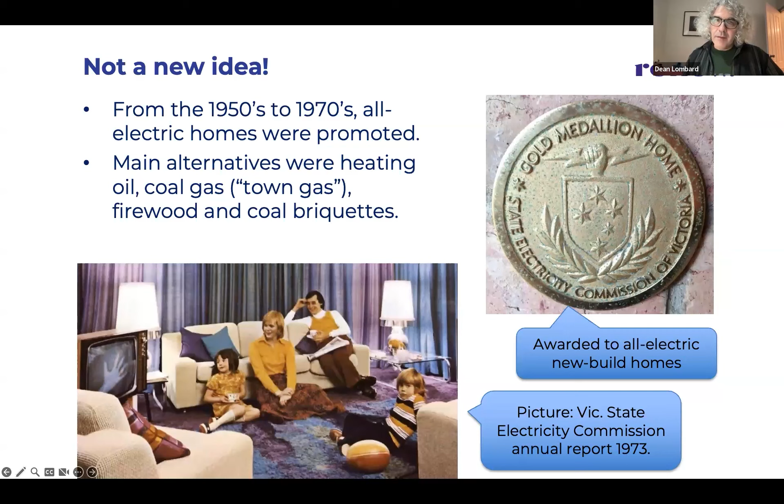That started to change in the 70s when gas became suddenly more available, especially piped gas direct to homes in Melbourne and later other cities and towns in Victoria. Gas was really cheap from the 70s to the 2010s, and that was really appealing. Gas appliances were much cheaper for heating and cooking, and gas cooking was way more flexible and nuanced than cooking on those old electric stoves. So gas became very popular, and there was a massive government support program to help people transition into gas appliances.

The whole city and many country towns were piped up. Whole house ducted heating became more and more common until by the 90s it was pretty much the default for most houses, especially in Melbourne and Geelong, and in a few other places in Australia, like Canberra, which has a lot of ducted gas heating, and some parts of New South Wales. Ducted gas heating burns a heap of gas, as you would know if you had it, but when gas was really cheap, that didn't really matter.

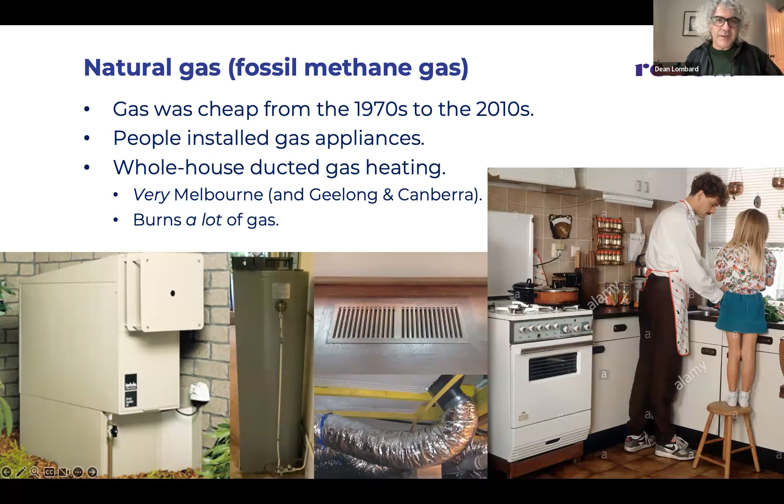Gas was so popular that a massive bottled gas industry also took off. In a lot of country towns where you couldn't get natural gas, people would get LPG gas bottles to run heating and cooking. A good thing to note is that natural gas is not necessarily natural - it's dug up out of the ground. It's actually methane, and it's just called natural gas because that was a good marketing term.

The story of why gas suddenly appeared and became cheap is basically that oil drilling started in the Bass Strait in the 1960s, and methane was basically a byproduct of drilling for oil. The pipelines were built in order to make some money off this otherwise waste product from the oil industry - that's why it was all built and why it was so cheap. But now the oil wells are pretty much dried up in Bass Strait, and gas is no longer very cheap. In fact it's gotten very expensive, and is getting more so with the impacts of the war in Europe and everything.

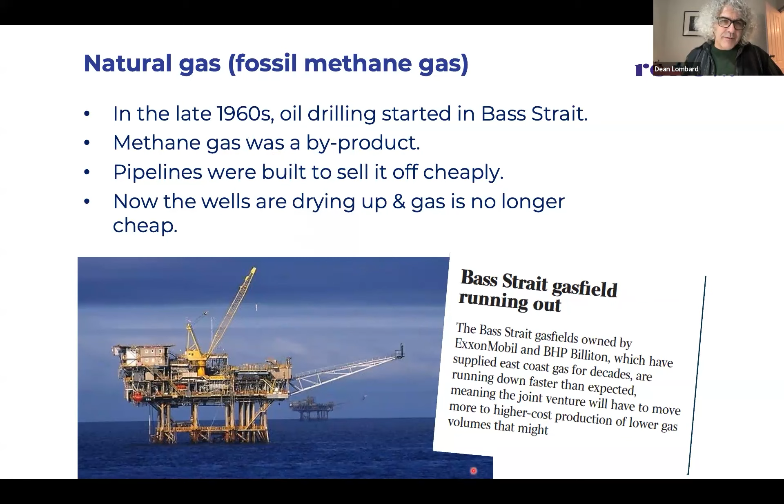So as the options for fuel in homes changed, the types of appliances that homes could buy changed as well. Some people are familiar with old style electric appliances, like stoves with resistive electric elements that take a while to heat up and then take a while to cool down. You've got to get the knack of how to cook with those, and we don't really like them very much in Melbourne, do we? We like our gas cookers.

Electric hot water systems also use a resistive element, same as electric radiators. The resistive element basically means the electricity goes through a wire that has a lot of resistance, which heats up the wire - that's how you get the heat. That's the basic principle for a whole lot of these old school electric appliances.

Once gas became the main fuel for cooking, heating, and hot water, we started to get gas stoves and gas hot water systems, which at first were pretty similar to electric, but fired by gas. Now more common are instantaneous gas water heaters that just heat the water as it's going through the pipes to come out the tap. And of course, gas heaters.

We used to have wall furnaces or console heaters, and now we're more likely to have ducted heating. But there's new electric technologies that weren't available in the 60s, and it's really based around the heat pump. The heat pump is really the same principle as a fridge, but sort of in reverse. It uses ambient heat from the air to make heat.

You've all seen reverse cycle air conditioners, often called split systems, that cool and heat. They use this heat pump to do that, and in 2023, this is a more contemporary heating appliance - a reverse cycle air conditioner or heat pump heater of some kind. You also have heat pump hot water systems, which use the same principle of a heat pump to heat the water instead of resistive electric wire.

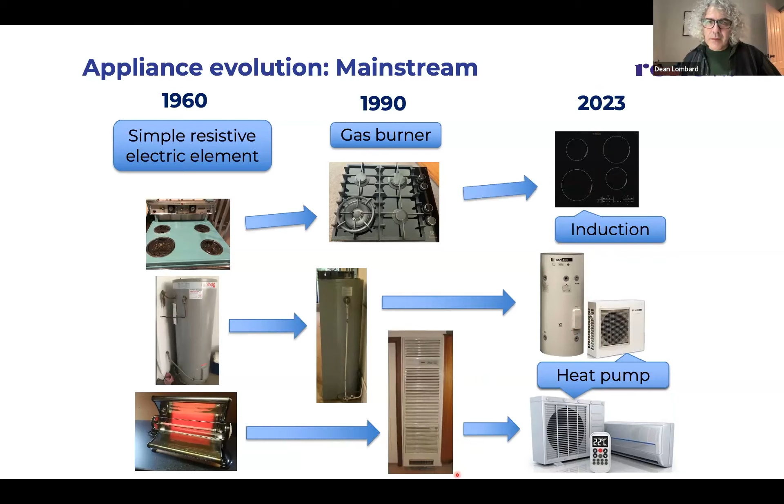So the heat pump is the big deal in these new types of appliances. Here's a little explanation of how it works. Basically, the box that's outside the house - it might be on the ground or up on the roof - is sometimes called a compressor. It's actually sort of the heat pump itself. It's got a compressor, it's got heat exchange, it's got all these parts to it.

Basically it sucks in air from outside, sucks all the heat out of the air, and then spits out the really cold air without the heat out the other side. You might not think there's that much heat in air, especially on a cold day, but even cold air still has quite a bit of heat in it, because we think of heat as being hot, but heat is actually just a quality of a gas or a solid - I'm not a physicist, so I'm explaining this wrong, but heat is in nearly everything.

If something's really cold, the thing with no heat in it at all is at minus 273 degrees Celsius. That's when there's no heat in the thing. As long as something is not as cold as that, it's got some heat in it. And that's what the heat pump does - it sucks the heat out of the air. This box is operated by electricity.

It basically spits the heat into the device that then heats your house through the stuff that's in here. There's a heat exchanger in there and a heat exchanger in there, and they use refrigerant liquid, which you might be familiar with if you've had to get your car air conditioning fixed. Refrigerant liquid is used to transfer the heat, to take the heat out or put the heat in.

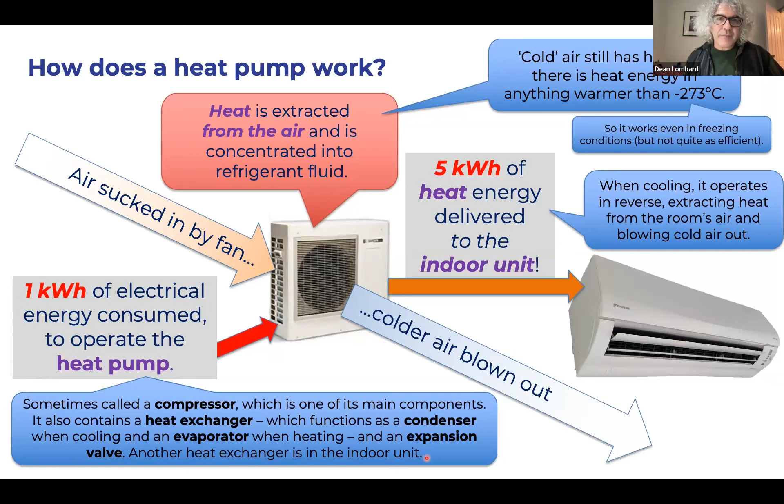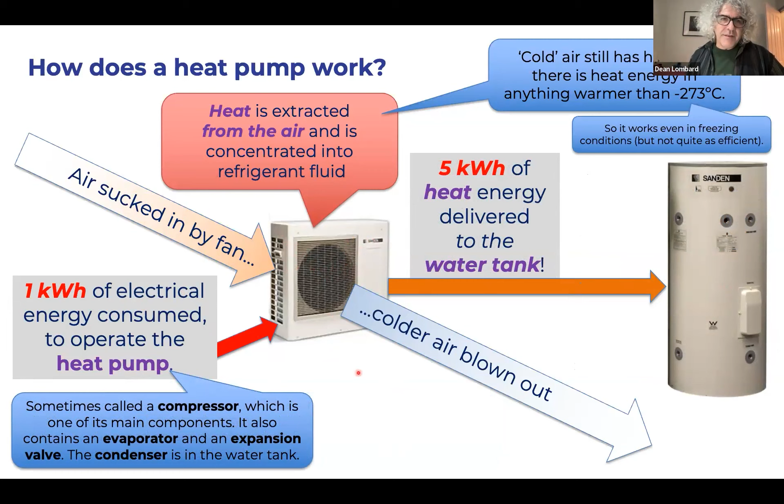Heat pump hot water systems work exactly the same way: get the heat out of the air, spit the heat into the tank. And if you run a heat pump backwards, you get cold instead of heat. That's how the air conditioner makes cooling, and that's also how your fridge works - it uses the exact same principle, built into the fridge, to take the heat out and make the stuff cold. So that's the heart of these efficient appliances.

The reason we talk so much about heating and hot water is because they're by far the two biggest energy users in our homes. This data is probably a few years old, and it varies a lot with different houses and depends on lots of things, but on average almost half the energy used in a home is used for heating in Melbourne, and 20 to 30% is used for hot water, with everything else making up the rest. Cooking isn't really very much, lights are hardly anything at all, and the fridge, if it isn't too inefficient, also not much.

So there's two reasons why we talk about these appliances when we're talking about all electric homes. One is because they're the biggest energy users in homes, and the other is because these are the things that can be operated by either gas or electricity - hot water, heating, and the cooktop. Pretty much everything else is usually only done by electricity. So that's why these are the important things when we're talking about all electric homes.

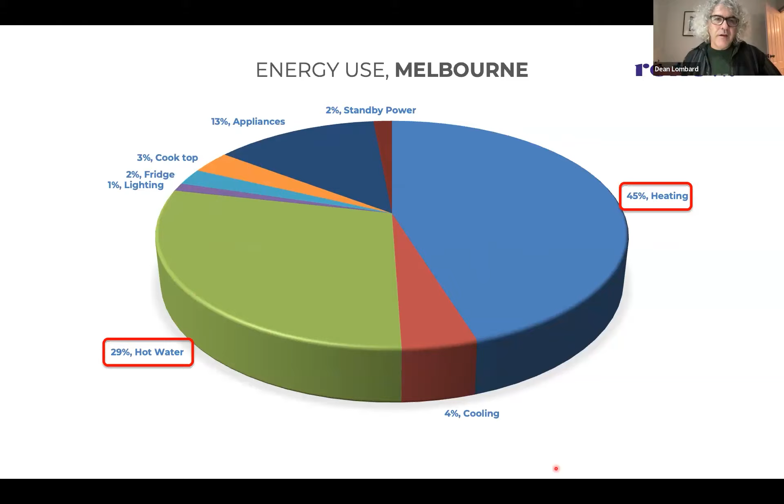So why you would want to go all electric, there's sort of two main things: what does it cost you, and how much carbon emissions does it make.

What we find is that back in 2018, the efficient electric appliances usually cost a little bit more upfront than the equivalent gas appliances. That's changed in the last few years - the cost difference, especially with reverse cycle air conditioners, has come down a lot, and they're much more equivalent to gas ones now. The heat pump hot water system still costs a bit more, but even in 2018, the lower energy bills over its lifetime more than made up for the extra cost and led to a saving. That saving is particularly driven by heating - we use a lot of heating in Victoria, and if you replace ducted heating with a few reverse cycle air conditioners, you pay it back in a few years and then you're ahead for the rest of the time.

We've done this study a few times, and this is the most recent one - it's a big job that needs a bunch of funding to do. But we did do a more recent study on a smaller scope last year, because you'd be aware that we've had a bit of an energy crisis, and energy prices have gone up and are going to go up for the next few years.

So we did a smaller study just looking at running costs, factoring in the rising energy prices over the next few years. And that modeling basically found similar sort of thing: everybody's prices are going up, but dual fuel homes' prices are going up faster and will go up higher than all-electric homes. People who are all-electric and have solar will have the lowest price increases. They'll still have price increases because prices are all going up, but they'll have the lowest.

This study also looked at the examples we use of a typical existing home and a typical new home. The difference between them is the thermal performance - the insulation, the draught proofing - because new homes have to meet a higher standard. This study also showed, again which we've done in several studies, that if you improve thermal efficiency by making sure you've got the right insulation, draught proofing and good window coverings, you also save a lot of money because you save so much energy usage.

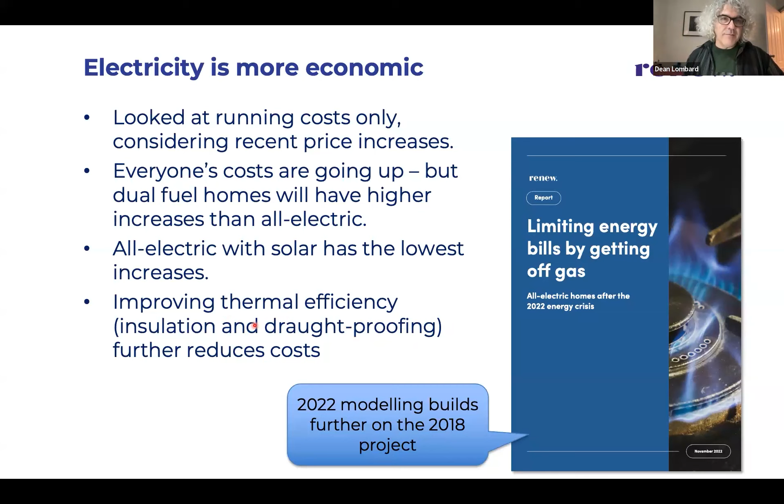Now, in our view, and in a lot of people's views, there's a lot going for getting rid of gas and going all-electric in terms of cost. And obviously the gas industry is not crazy about that idea, because they see that as a bit of an existential crisis for them. They'll often say, well, gas is actually cheaper than electricity, and they'll question the sort of modeling that we do.

So I'm going to run through the cost thing because it can be a bit confusing. If you look at your bills, you'll see - and this is current prices - gas is about 3.4 cents a unit and electricity is like 23 cents a unit. That's a big difference. Gas is looking a lot cheaper than electricity there.

But if you look closer, you'll see they're different units, because gas is measured in megajoules and electricity is measured in kilowatt hours. If you're going to compare the prices, you need to compare them in the same units. There's 3.6 megajoules in a kilowatt hour, so gas is actually 3.6 times more than the price it says there in equivalent units. If you look at them both in the same units, kilowatt hours, gas is actually about 12 cents a kilowatt hour and electricity is about 23 cents. Gas is still about around half the price.

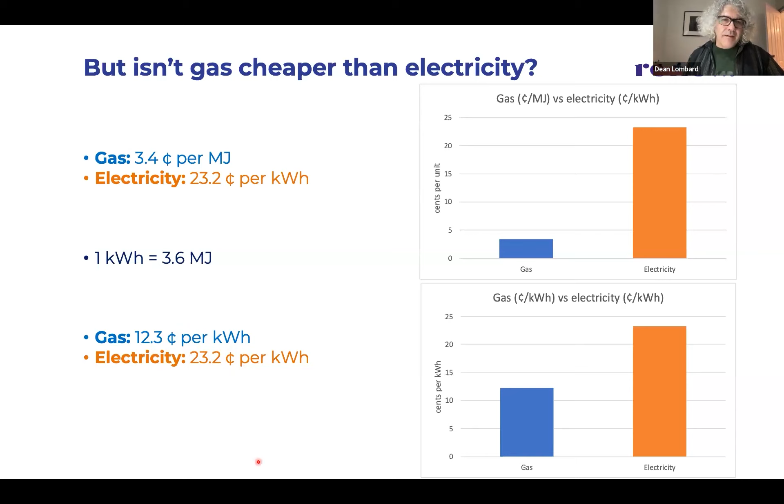So that does seem to back up the gas industry's claims that gas is much cheaper than electricity, and that's normally the figure that they use - gas is half the price of electricity in the same units. But there's one other factor that they sometimes conveniently forget, which is that it really depends on what you're using it for.

If you remember from a few slides ago about how heat pumps are much more efficient in their use of energy than other electric appliances, that's actually the trick, because a gas ducted heating system is about 80% efficient. That means for every 100 units of gas that goes in, 80% comes out as heating in the room, and about 20% is lost - some through the ducts, some through the process of combustion. And that's an average. A brand new system might be a bit more efficient, an old system could be a hell of a lot less, like 50% if there's holes in the ducts. So it does vary a lot.

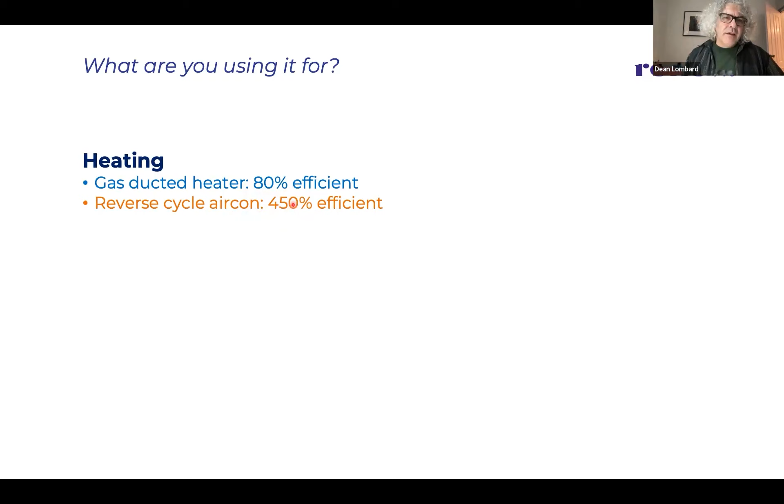Reverse cycle air conditioners are 450% efficient or often more. And remember, that means you get more out than you put in, because we put a bit of electricity in to suck all this heat out of the air, and then that's the heat that goes out. So reverse cycle air conditioners are many times more efficient than gas ducted heating, if you look at it in terms of energy in to heat energy out.

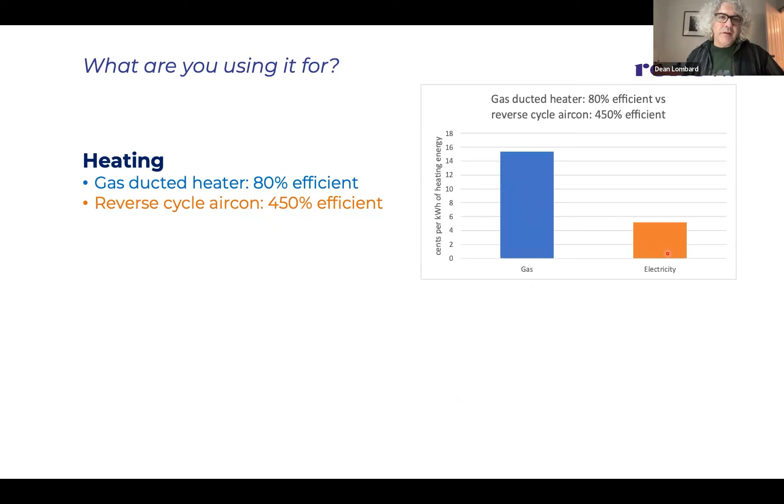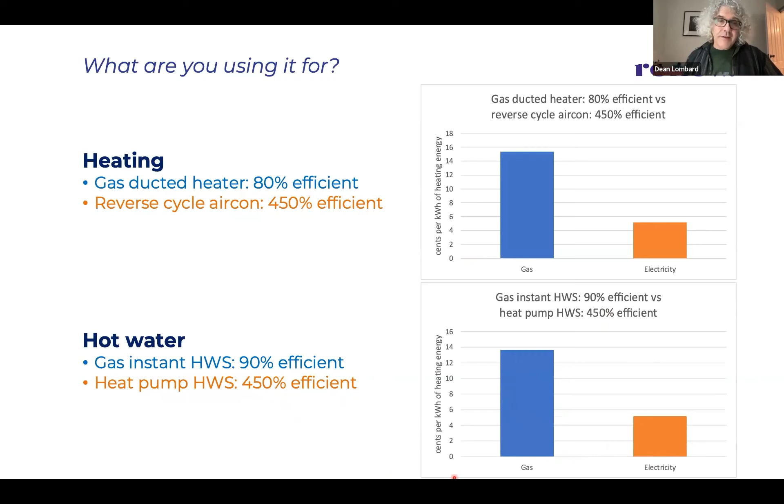So if you factor in the efficiency, gas ends up sort of 2.5 times more expensive than electricity, if you look at the cost per energy output of the heating device. And it's a pretty similar story for hot water - instantaneous hot water systems are very efficient, 90%, pretty good. Heat pump hot water systems are also about 450% efficient. So again, when you look at fuel cost in to heat energy out, gas is about twice as expensive. And this is the secret, the mystery of why these heat pump appliances are so much cheaper to run than gas appliances, and indeed than the older style electrical appliances that use resistive elements.

Now, that report I showed you, that orange one, has lots of very detailed modeling in it. We looked at a whole lot of different appliance replacement scenarios, and the take-home message is replacing gas ducted heating with a few reverse cycle air conditioners arranged around the house to get the equivalent heat costs a little bit more, maybe, but will save so much money that it pays back any difference in a year or two, and then you're basically spending less.

Hot water, when we did this study in 2018, it was sort of break even, because the heat pump hot water systems are quite a bit more expensive than the gas ones, but they cost less to run, and you break even over the life of the appliance, which was about 10 years. Of course, they sometimes last longer. Heat pump hot water systems are a bit cheaper now, so that's probably a bit ahead.

Cooktop, replacing a gas cooktop with induction. The inductions tend to cost a bit more, but they've also come down a bit. They cost about the same to run, so that's also a bit of a break-even sort of thing. Though, as I said, cooking doesn't use much energy, so it doesn't really matter so much. The main thing to think about with cooking actually is the health thing, because gas cooking puts particulate pollution in your air, which has been shown to be bad, especially for kids who are prone to asthma and people with respiratory illnesses.

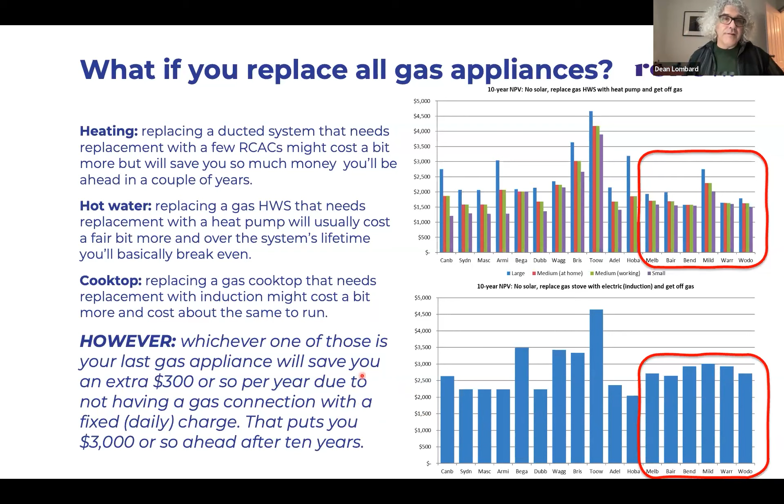The other part of this story, though, is, I mentioned before about that gas fixed connection charge. If you get your last appliance off gas, you suddenly save another $300 per year, in addition to any usage saving, because when you close your gas account, you no longer have to pay that daily connection. And that actually makes quite a big difference. That's why, even though cooking doesn't cost much money compared to the other stuff, and even though cooking with induction is not really that much cheaper than cooking with gas, if this chart here shows, if you only have a gas cooktop on gas and you swap that for induction, you actually save $2,000 to $3,000 over 10 years because you're losing that supply charge.

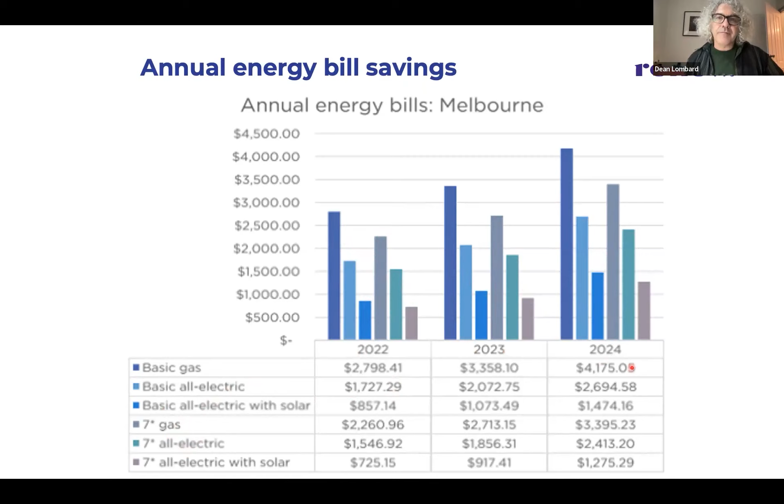If you're really interested in that, you can look up that report on Renew's website and read all the gory details. I'm going to move on to the emissions story, because this is something also that people are very interested in.

And it's also one that there's a bit of misinformation or misunderstanding about, because, again, gas is often talked about as a much lower emissions fuel than electricity. And for a long time, that was probably true, because electricity was basically made by brown coal in Victoria, which is the most polluting coal that there is. But of course, now there's a lot of renewable energy in the grid as well, so that's brought down the emissions intensity of electricity quite a bit. It's still higher than gas.

Gas has much less emissions than electricity. There's a bit of a caveat there, because the emissions of electricity generation are very tightly regulated and controlled and monitored, because it's just under the regulatory framework for electricity.

The emissions of gas are not closely monitored and measured, so there's a lot of doubt as to how accurate the official figures are. Some people say the emissions of gas might be 2 or 3 times higher than the official figures, but I'm not qualified enough to have a definitive view on that.

So I'm going with the official figures. In Victoria, the emissions intensity of gas - basically how much carbon emissions there are per unit, in this case per kilowatt hour, using the same units for both fuels - compared to the emissions intensity of electricity: electricity in Victoria is 4.6 times more dirty in terms of carbon emissions than gas.

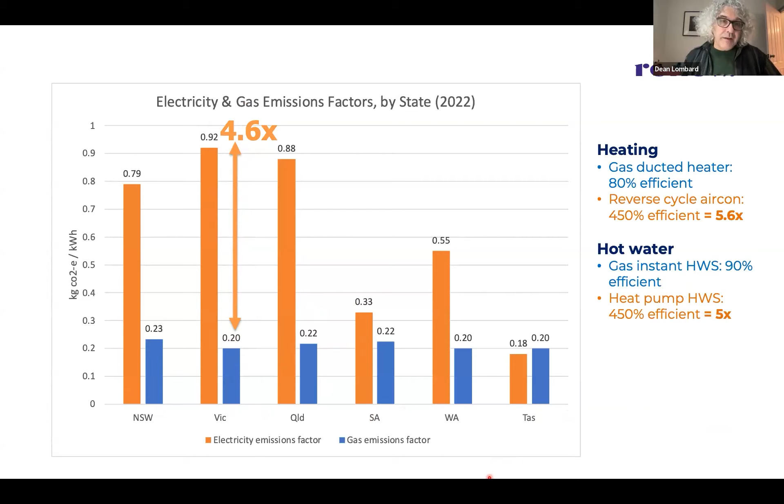And this is all the main states - that's Victoria. Renew did a more exhaustive study in 2019 using a similar approach to the cost study: let's look at the house in total and all its electricity usage, its different appliances, and how the emissions of an all-electric home compare to the emissions of a dual fuel home. We looked at a few cities in each state, and the Melbourne ones are over the side here - that's Melbourne, sorry, the other Victorian ones.

It's a bit close, but dual fuel homes have higher emissions than the equivalent all-electric homes everywhere in Victoria, apart from the really hot areas like Mildura, where it's actually a tiny bit more emissions with all electric. That'll be different now because electricity has become less emissions intensive since we did this study, so that'd be more level.

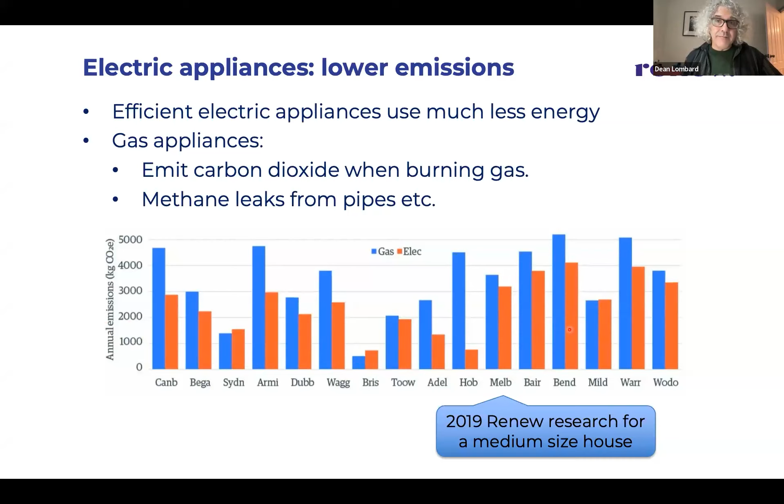And all around the rest of Australia, it's only in Brisbane and Sydney where there's not that much heating - they're the only places where all-electric homes have more emissions. Everywhere else, all-electric homes have lower emissions than dual fuel homes.

And that's emissions now - emissions keep changing. Gas is actually getting dirtier because, like I mentioned before about the Bass Strait oil rigs drying up, more and more gas in Australia now is not taken from deep sea drilling, but is on ground, what's called unconventional. You would have heard of coal seam gas and fracking - they're the most common ways for new gas projects to be happening now.

In Victoria, we're still getting the dregs out of Bass Strait, but most other places, most of the gas comes from fracking or coal seams, and that's much more emissions intensive than taking gas from deep sea drilling, as well as, you know, methane leaks and groundwater risks.

And of course, the other thing with our gas industry is one of the things that's driving the price is that we're exporting so much gas. About 70 or 80% of the gas that we mine in Australia is exported overseas, and that's what's driving our price high. So when people talk about a gas shortage, the shortage is because the gas companies are selling 80% of it overseas and only leaving us with 20%.

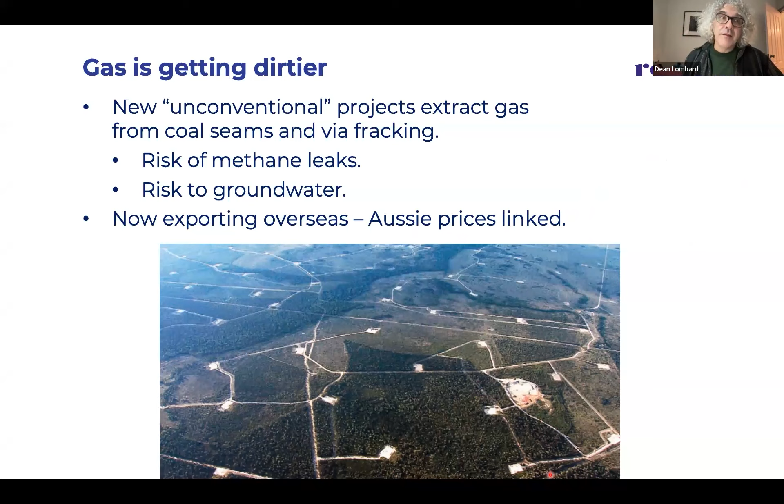So gas is getting dirtier. Electricity is getting cleaner every year. Solar farms, wind turbines, ginormous projects like Snowy Hydro - when that's done, that's basically a ginormous battery that will store excess solar energy during the day and use it at night - as well as, of course, people putting solar on their roofs, that all becomes part of the grid. When you're exporting electricity from your solar, that's part of the grid. So every year the electricity grid gets cleaner.

It's already about 30% renewable, which surprises some people because we're used to thinking of electricity as coal. 30% of it is not coal or gas, it's solar, wind, and hydro. We buy a lot of hydro from Tasmania. There's heaps of solar farms and wind farms, and we also buy solar and wind from New South Wales and South Australia.

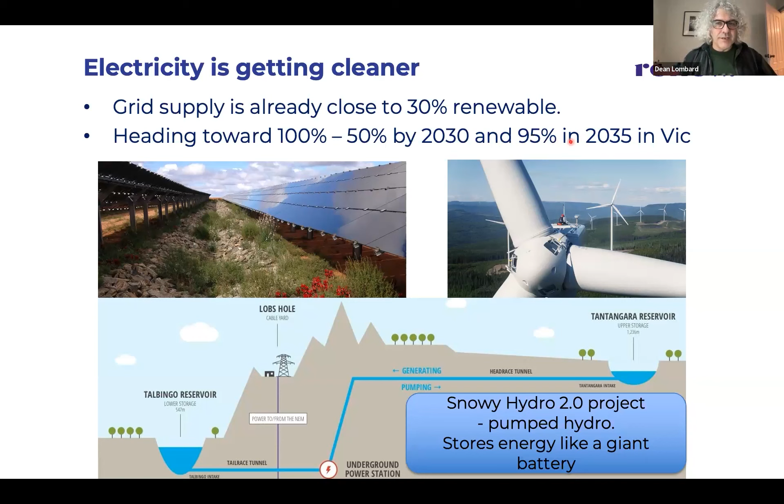And we are heading towards 100% renewable eventually. The Victorian government has a 50% renewable energy target by 2030, 95% by 2035. And nationally, AEMO, which operates the national electricity grid, is predicting about 83% renewable energy in 2030. So that's a huge change.

So if we look back at this emissions chart, that's 2022, because these are the 2022 figures. That's emissions of electricity and the emissions of gas in these 6 states. Yeah, 6 states.

That's now, but what does 2030 look like? Have a look at this. It blew my mind when I did these numbers. That's what happens in the next 7 years. So much more renewable energy comes online that the emissions of the electricity grid in every state drops by heaps, apart from SA and Tas, because they've already got very clean electricity. And, you know, Victoria goes from the dirtiest to actually still the dirtiest, but less than gas.

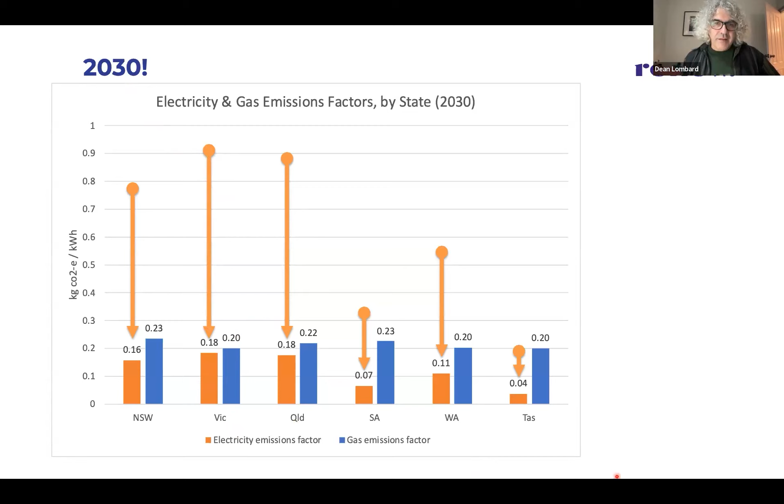We've got gas about the same here. It's probably going to be higher. But by 2030, in every state, electricity is less emissions intensive than gas. And that's before you even factor in that whole multiplier issue with the more efficient appliances. So even though it's a bit here and there now, not that different at the moment, your new reverse cycle air conditioner or heat pump is still going to be going in 2030, and it's going to be heaps more emissions friendly by then. So it's always dynamic, it's always changing. That's the difference.

Next, I'm going to look at the appliances, because people thinking of going electric often want to know how the appliances are different, and there's a bit of misinformation going around about some of these new types of appliances as well. So I'm going to start with hot water because we get the most questions about hot water.

Your heat pump hot water system is pretty much like your traditional gas storage hot water system. I'm sure some of you probably have gas storage hot water systems. Others will probably have the instantaneous ones, which are a bit different. The instantaneous gas is actually much more efficient than the gas storage because you lose a bit of heat with storage. And it's the same with the heat pumps - you do lose a bit of heat with the storage. But, as I said, they're so much more efficient. They basically work just like those gas storage systems, water's in there, whack the heat into it. It's just instead of burning gas, you're using the heat pump.

People often ask, will there be enough hot water? I've heard that they don't give you as much hot water. It's like, they're just a tank with hot water. You just got to get the right size tank. If you've ever had to buy a storage hot water system, you know that you've got to know how big's my house, how many bedrooms or how many people live in the house, what's the right size tank? Is it 300 liters, 400 liters or whatever? You just need to know what the right size tank is for your house and just get that size tank. That's as simple as it is.

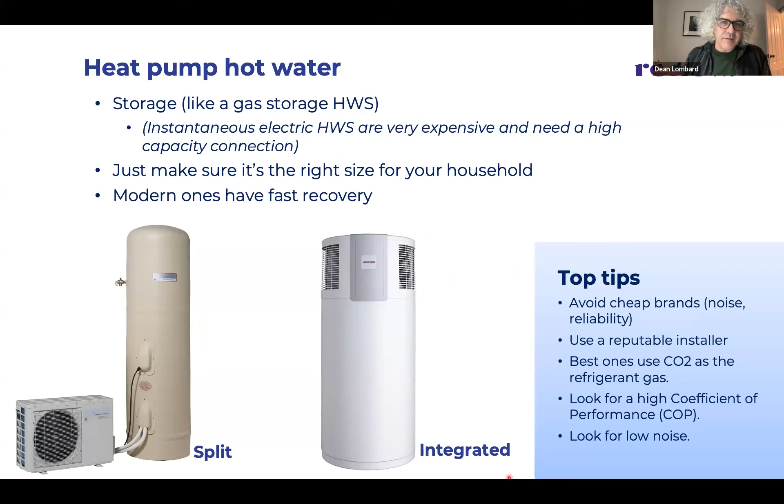Before I go on, I did mention instantaneous gas hot water, which people often like and is quite efficient. You can get instantaneous electric hot water systems, but they're not heat pumps - they use resistive electricity. They're actually relatively cheap to run because you save all those storage losses, but they're very expensive to buy and need a really high capacity electricity connection, like 20 or 30 amps, because they use a small amount of electricity but intensely for a short period. So they're not really very practical for most people - we haven't really talked to many people who've got them because they're expensive and expensive to install.

Reverse cycle air cons - you're probably more familiar with these because the air conditioner in your house is probably a reverse cycle air conditioner. These heat great. People often don't use them for heating because we're used to thinking electric heating is expensive, but as we've discussed, the heat pump technology means it uses way less electricity than a regular electric heater. So they're not expensive to heat - in fact, they're cheaper than using a gas heater.

For reverse cycle air cons, you'd probably put a few in your house. If you're used to ducted heating where you want the whole house warm, you'd need a few reverse cycle air conditioners - that's how we did our modeling. We had one main air conditioner in the main room, a larger size one, and a few smaller ones around the house, strategically located depending on the size of the house.

There's really a bit of trial and error in how you use these things. If your house has good insulation, the temperature equalizes through the house, so it doesn't really matter so much where they're located. And if you have trouble heating your house, it's always best to fix your insulation before you start spending money on new heaters, because a great efficient heater in a poorly insulated house will still cost a lot of money to run and won't heat the house properly.

Some people don't like the air blowing on them from reverse cycle air conditioners, but you can use a low fan speed and vary the direction that it blows, and that changes it a lot. Running them on quite low usually works. You can also get ducted heat pumps that work more like ducted heating, but they're less efficient because there are lots of losses in the ducting.

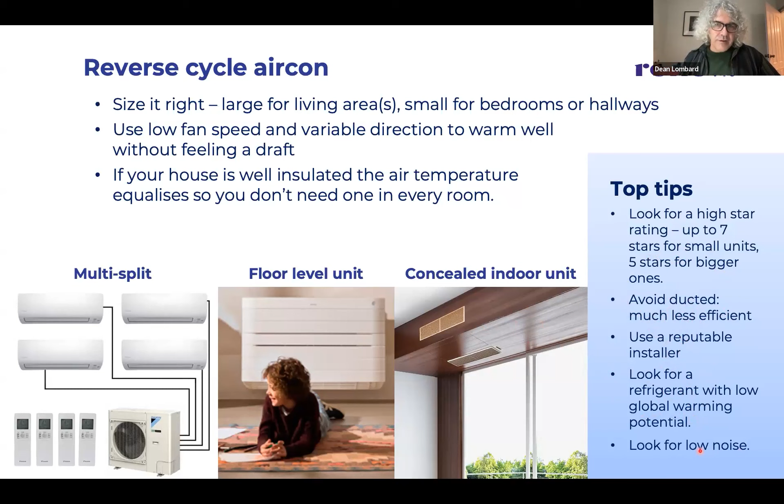Look for refrigerants with low global warming potential, and the noise issue as well.

Induction cooktop. Now, this is not heat pump technology, but this is also not resistive. This is another type of electrical technology — induction. The induction basically sets up an electromagnetic field that heats the cooking appliance directly, rather than via making something hot to touch it. It actually stimulates the molecules inside the pot.

It's very, very different to the electric stoves that you might be used to, because they turn on and off and down with very quick response, similar to gas. Turn them up, they get hotter. Turn them down, they get less hot, which is very different to the old-fashioned resistive ones where you turn it on and it takes 5 minutes before it's hot, and then you turn it down and it takes 5 minutes before it cools down.

These respond pretty instantly like gas. They boil water as quick as gas — we've tested them next to each other. They're sort of safer because you don't have the open flame. The manufacturers always use these photos of a block of chocolate right next to a pot full of melted chocolate. That really does happen because the top surface doesn't actually get hot — just inside the pot gets hot.

But because of the way it works, it needs the right sort of metal cookware to work. So it doesn't work with ceramic cookware, doesn't work with copper, doesn't work with aluminium, and some really low grade stainless steel that's got lots of other stuff mixed in with it doesn't work so well either. The general guide is if a fridge magnet sticks to your pot, then it'll work with induction.

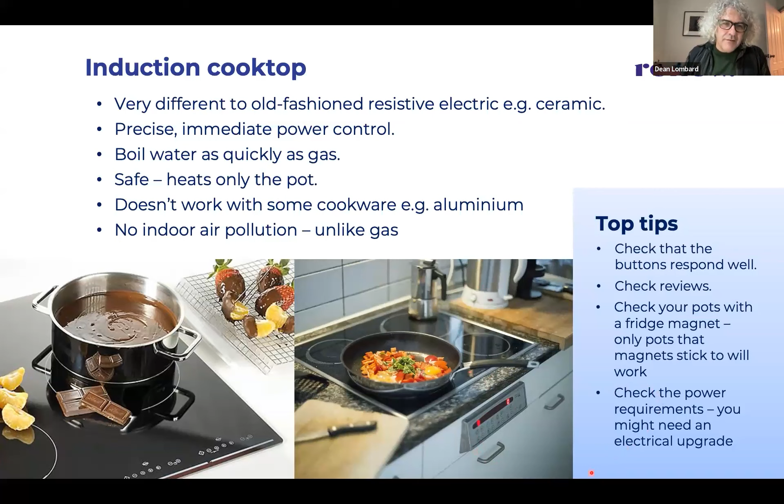That's what I did when I was working at Renew. I tried out theirs to see what it was like, and I was very surprised. I love cooking, I love my gas stove, but using the induction cooktop, it's like, yeah, I could totally use one of these - it's just as good as using gas. So that was a bit of an eye-opener for me. That's one to try if you're a bit doubtful.

I want to go over a few alternatives to these appliances. Those three appliances I talked about - heat pump hot water, reverse cycle air conditioners, and induction cooktops - are the standard efficient ones we generally recommend as really good replacements for gas appliances. But there are some other appliances worth mentioning because people often ask about them.

One is solar hot water, which you would have seen around - they've been around for quite a while. They're pretty popular, partly because there's been a state government requirement to put them on in certain developments and for new houses. They work a bit differently to heat pumps. They have solar collectors, which are not the same as solar panels - they actually heat the water directly with these collectors, then store the hot water in a tank, either on the roof, or on the ground like a regular hot water tank, with a pump connecting them together.

A lot of people love these. I did a bit of research on the costs. They need to have a booster, because if it's cloudy and the water doesn't get hot, you still need hot water, and it's also a safety issue - the water has to stay at a certain temperature to avoid Legionella. That's the thing with all hot water systems.

So you either get electric boosted or gas boosted. Electric boosted costs a little more than running a heat pump. Gas boosted costs maybe about the same or a bit less than running a heat pump, so they're economically pretty similar. They do cost a lot more to buy though - they're pretty expensive. If you've got space to put solar panels and run a heat pump off your solar, then it's almost free. So that's a good consideration.

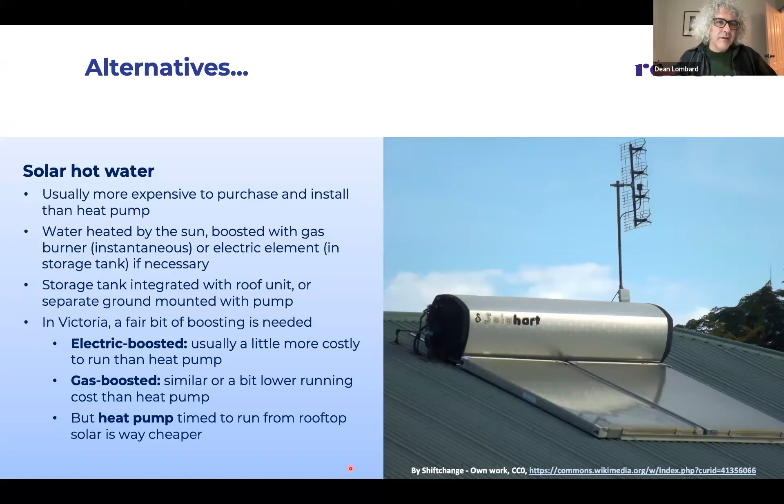Hydronic heating, a lot of people love. They love the heat wafting around the house. The whole house heat you get from hydronic heating is very pleasant. Hydronic basically heats water and circulates it through radiators or under the floor. They're very expensive to buy, install and run, so they're not a great economical outcome, but people do like them. And if you like them, they might be worth it.

They are a bit slow to heat up and cool down. And if your house is well insulated, you'll probably overheat. We often talk to people who end up having to open their windows in the middle of winter because their hydronic system's going and it's too hot. And they generally run on gas.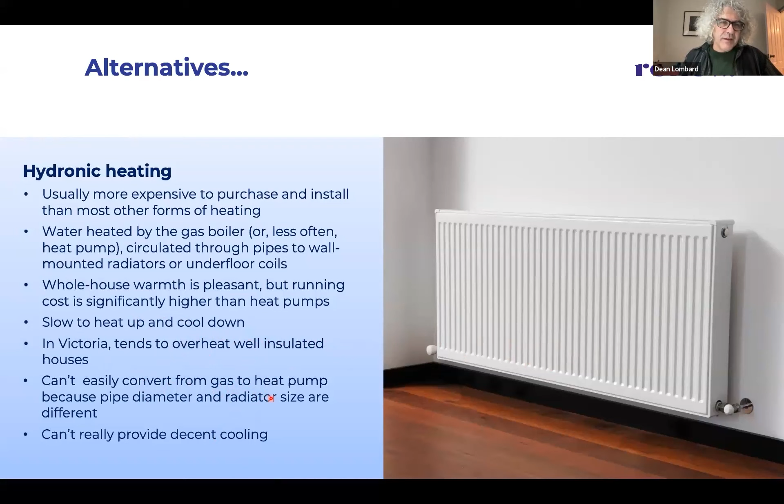Heat pump ones are more expensive, and you can't just convert a gas one to a heat pump because the pipes are the wrong diameter, the radiators are the wrong size, and they don't cool. So some people swear by hydronic, and if you really love it, go for it. But we don't consider them in the efficient electric category because they're expensive.

Evaporative cooling is another one people ask about. You would have seen these on houses, you might have it in your house. They're pretty cheap to run in terms of electricity, but they also use quite a bit of water, could be up to about 20 litres per hour. So that can add up in cost and also in water.

And look, they work pretty well. They're less effective when there's high humidity because it's a damp cooling that they put out. And we're actually getting more humid in Victoria, which you would have noticed the last couple of summers. So I don't know that they're the great choice going forward, to be honest.

And of course reverse cycle air conditioners heat and cool, so you pay once for the two functions, whereas if you've got a cooling system like this, you still need to buy heating separately. Some people really like them though. You need to cover the ducts in winter, the outlets, otherwise you lose heat from your heating.

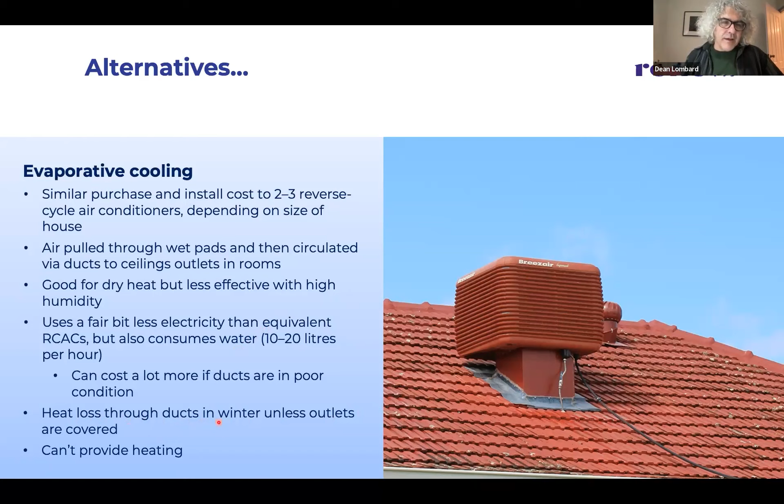So that's the lowdown on appliances. How do you go about doing the shift? We're getting close to the end here, so there'll be time for questions soon.

First thing is there's a lot of help with the cost of these upgrades. If you decide you want to move from being dual fuel to all electric, you want to buy some heat pump hot water systems or reverse cycle air conditioners, there's a few programs the Victorian government runs that will give you a discount on these technologies.

Heaters can be gotten through the Victorian Energy Upgrades program. You'd all be familiar with this program probably because when people come to your door offering you free light bulbs, that's the Victorian Energy Upgrades program. It's linked to the Victorian Energy Efficiency Target. They give you the light bulbs, you use less electricity, and they get paid for making people more efficient. They get paid by electricity retailers who are obliged to get their customers more efficient. That's sort of how it works.

There's heaps of stuff in that program that's not no cost for the consumer, but gives a big discount, and one of them is heaters. You can get efficient reverse cycle air conditioners, other heat pump based heating, through the program. You get a rebate - it's a bit complicated, depends on what inefficient heating you've currently got and what you replace it with, but you can get between $150 and about $1,300 rebate on new heating, depending what you get. So that's one to look out for.

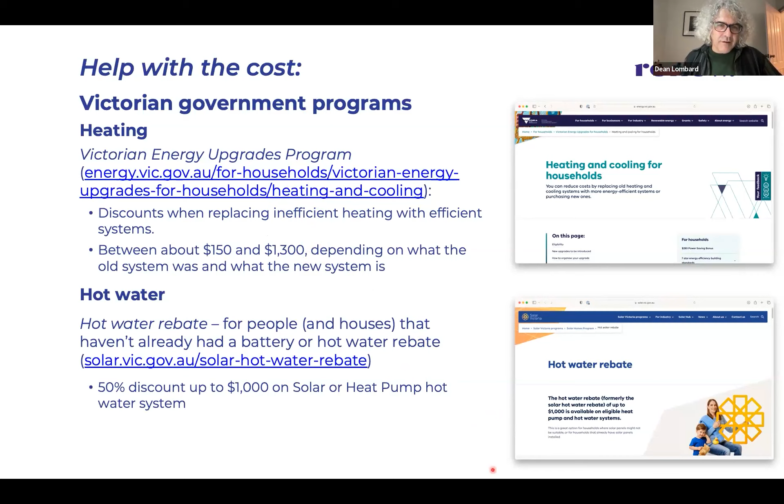The Victorian government is currently working on new heating upgrade rebate programs, but I don't know any details of that yet. I just know that they're working on it. So watch whatever space you need to watch to find out about that.

So that's the bit of financial assistance for doing it. But what's the process? The way that we did our modeling on the cost was we based it on one appliance wearing out and needing to be replaced, replacing it with the efficient electric one instead of another gas one. In our view, that's the natural way to upgrade.

If you're really dead keen and if you've got the resources, sure, rip out all your gas appliances, whack in all the electric ones. But for most people, it'd be like, well, my heater works fine, I'll replace it when it needs to be replaced. And that's what people will normally do. So if it's failing, that's the time to go, well, let's get the electric one instead of gas.

We know that the cost is about the same or maybe a bit more, but the cost of running is much less. It's particularly an important issue with hot water, in that if you do want to change your hot water to a heat pump or solar or something, when it fails, do your research first, find out the model that you want, find out someone who can install it and find out a supplier who's got supply. Because if it's ever happened to you before, and I'm sure it's happened to some of you, when your hot water fails, you don't have any time to do anything because you just want to have a hot shower. Nobody likes a cold shower, apart from 1 or 2 people.

It always happens very quickly. And I've spoken to so many people who were really keen to replace their old gas hot water system with a heat pump. And then when their gas hot water system failed, they call up the plumber, and the plumber's like, well, I can put a new one in right now, I've got one on the truck, another gas one. Oh, if you want a heat pump, it's going to take a week and a half. So they end up getting the gas one when that's the last thing that they wanted, but they weren't prepared and they weren't ready. So do your research with hot water if you want to do it, and find out what you would need and be ready, and find out who's got them in stock and keep posted on that.

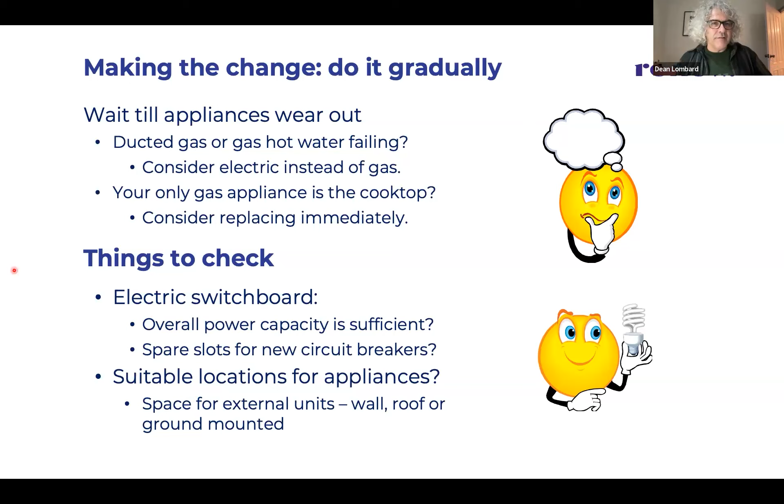And some of our houses are really old and weren't really made for that much use. So is your switchboard big enough? Has it got spare slots for new circuits? What's the capacity of it? And also check out the locations, because these heat pumps have external units. They can go in the roof, they can go in the wall, they can go in the ground, but figure out where you need to put them in your house. And when you're doing it, find installers who are familiar with the technology and with those types of models, because they all know the best way to do it.

Now, once again, I've talked about a few main appliances as the most recommended ones, but everyone's situation is different. And one thing that we discovered doing this work was some of the edge cases. Here are a few examples. If you've got really, really, really low hot water consumption, then a heat pump hot water is probably not cost effective for you. It's probably going to cost you more, because you're using so little, you really never recoup the cost.

You might want to do it anyway, great. But if it's really about the economic issues for you, then if you've got super low hot water consumption, maybe an instantaneous gas hot water is best if you're happy to stay on gas. This is often the case for holiday houses that aren't used half the time.

You just waste so much electricity heating up a big tank every day and letting it cool down. If you've got a really big solar system in your house, it might be more cost effective to get an old-fashioned resistive electric hot water system, either in the ceiling on an overnight rate, or on the ground, and just set the timer so it runs while your solar is generating. It uses a lot more electricity than a heat pump, but if you've got heaps of solar that you don't use, you may as well use it. It can actually be cheaper to use a cheap resistive electric hot water system than a more expensive heat pump that's got more issues with breaking down, because those cheap hot water systems can last for decades.

If you've got no room for a heat pump, that's when maybe solar is good for you.

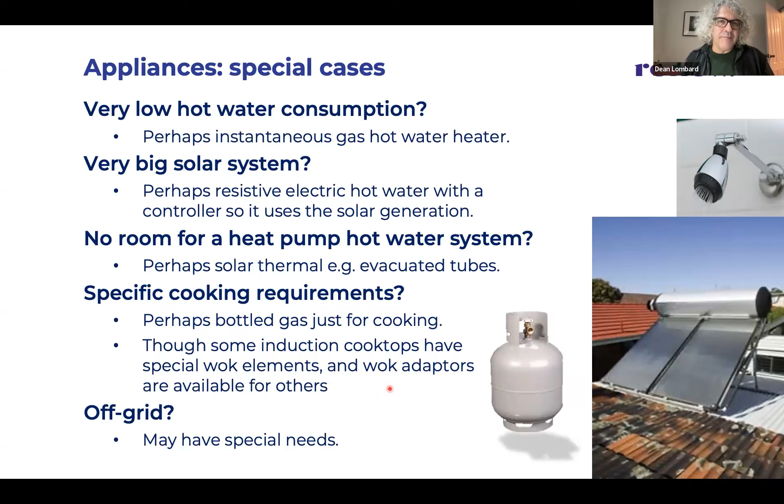But that's just a few things to think about. I'll try and finish up because we're running a bit low on time.

You'll need to close your gas account if you go off gas, so you don't keep paying that daily charge. That can be a bit tricky because the gas companies don't like you doing it and they'll try to talk you out of it. You just gotta knuckle in and insist. Basically, there's probably going to be an account closing fee.

You don't have to have the gas meter removed, you can just leave it there. They'll come and disconnect it, or they'll just turn the tap off and lock it so you can't use gas when you close your account. If you want the gas meter removed, you have to pay a much bigger fee, maybe about $1,000. For some people, that's worth it, especially if they want to do some landscaping and just get the gas stuff off their property.

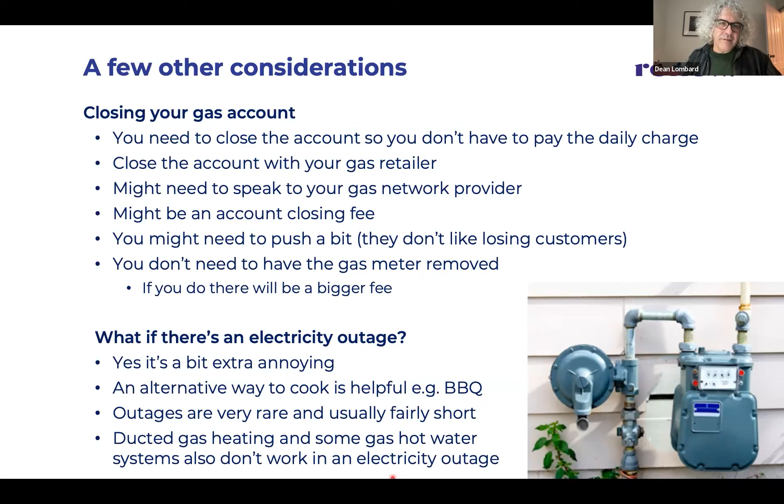If there's an electricity outage, it's a pain. But most modern gas appliances need electricity anyway, so it doesn't make much difference for a lot of people whether you've got gas or electric during an outage. An alternative way to cook is always helpful if you've got a gas barbecue or a butane cooker. But especially in the city, outages don't really happen very often, so that just annoys us whenever it happens anyway.

A good way to test out the heating is if you've got an air conditioner that does heat, just try it, especially in the in-between season like right now, when it's not super cold. Try the air conditioner in your room as a heater instead of using the gas heating. See how it feels, see what difference it makes to your bill.

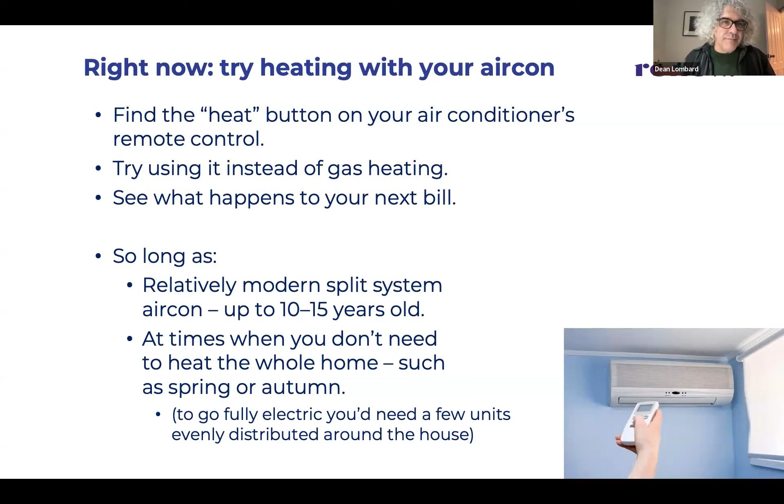You could be surprised, and we did a test of this. One large living room, using a reverse cycle air conditioner instead of a gas wall heater, you save about $200 over winter in Melbourne doing that. And that's prices of a few years ago, it's probably even more now.

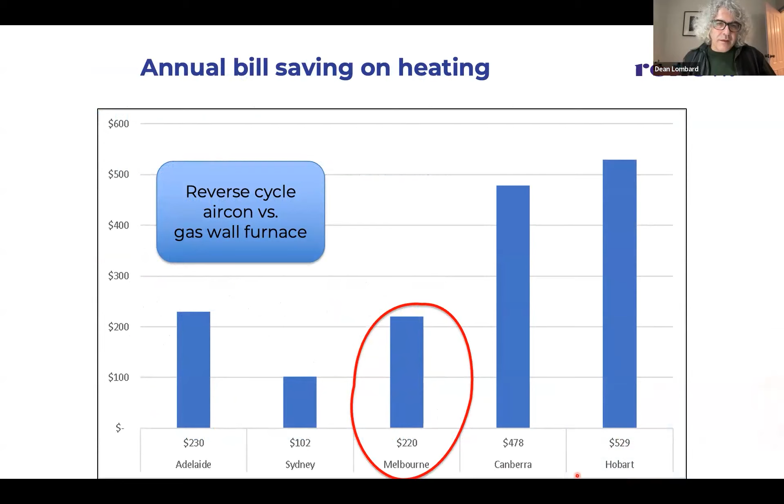I'll run quickly through the rest. If you're building a new home, just don't get gas at all, go all electric. It's way cheaper to build, and from the get-go you just start saving money. Renew did a bunch of research on this a couple of years ago. Again, new homes are more efficient, you use less electricity.

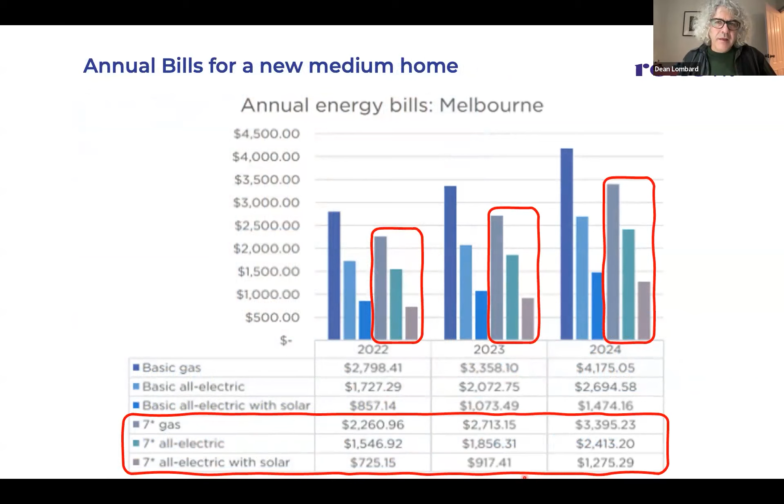Whether you got a new home or an old home, good insulation and draft sealing makes a huge difference. You can upgrade an old home to 1 or 2 stars better performance usually. You won't get an old home up to 7 stars, but you can do pretty well with insulation and draft sealing.

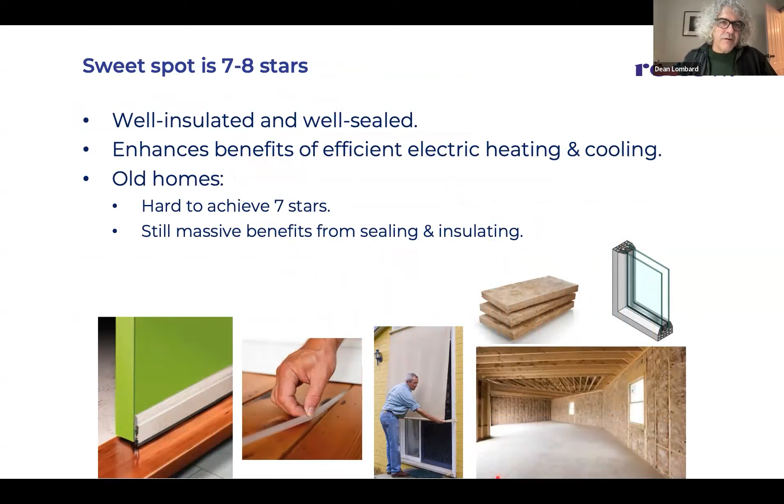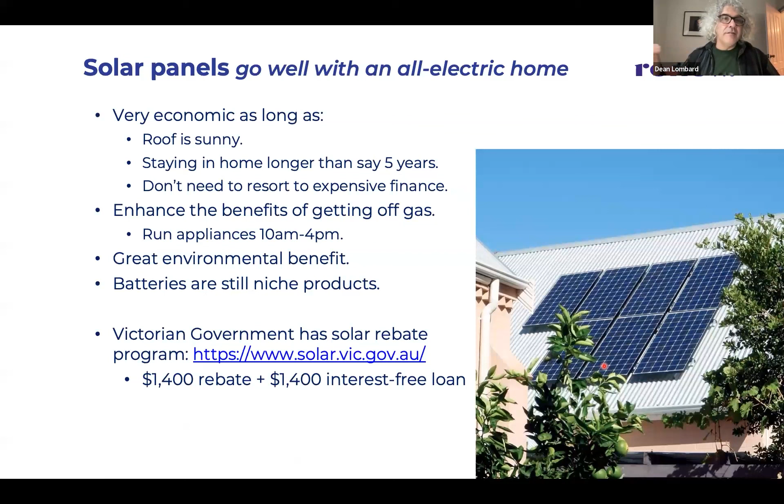Solar panels are the perfect complement to an all-electric home because you're using more electricity since you're not using gas, and you can use a whole lot from your solar. So that really works out well for all-electric homes.

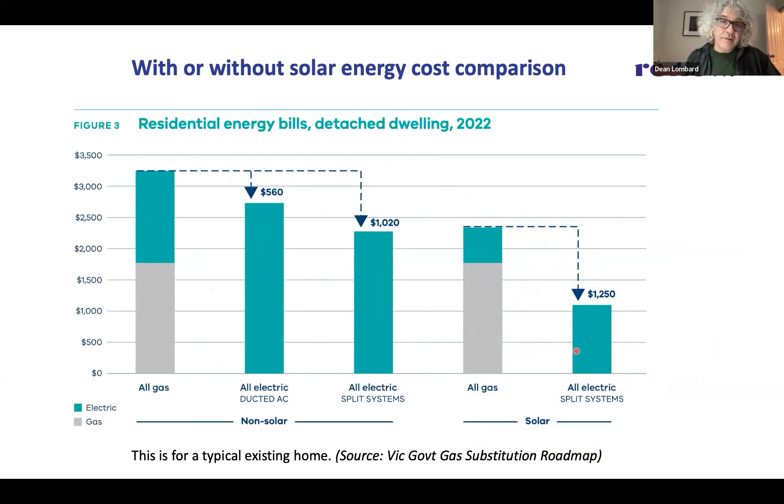Once you've done your all-electric thing, you can start thinking about the next fuel to get rid of, which is petrol. The Victorian government's just announced an electric vehicle subsidy. I think electric vehicles are still just starting to happen, but in the next few years there's going to be a big change. So start to think about that too, because that's the next step in going all electric - getting your mobile fuel use electric as well.

If these notes get sent around, the residential efficiency scorecard is a system the Victorian government has that will do an energy assessment of your home and tell you what the best bang for buck is in order to get your energy usage down and get more efficient.

If you go to the energy comparison website that the Victorian government runs, you can apply to get a $250 chunk of money sent into your bank account just for trying out the energy comparison service. And while you're there, see if you can find a cheaper retailer.

Sustainability Victoria - just Google them. They have a great web page on their site with great information about going all electric. And the Your Home website, which is a Commonwealth government thing, is just the absolute exhaustive reference to everything to do with household energy efficiency and thermal efficiency. That's a really good resource.